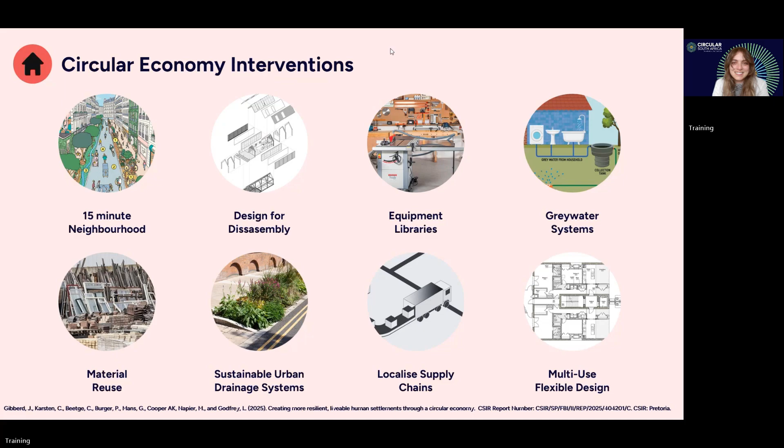So I work in the circularity space, and it's a space that I've worked in for a couple of years. I call myself a community architect because my approach is to use community, large groups of people, towards the green agenda and circularity. In Africa, ironically, circularity is not new.

I'm referring to communities of practice within the peri-urban spaces. Everything is recycled, reused to death. This is mainly due to, I'd say, maybe poverty, or just the nature of being able to reuse stuff.

However, in mainstream architecture, we do not do this so much for various reasons, be it legislature, be it the risk that engineers and architects in the city see in reusing building materials or construction demolition waste, as it's called, CDW. So I set myself the task of creating various projects that I'm going to present to you that showcase that it is possible to recycle and reuse material, whether from industrial or other sources, and also from demolition sites, and reuse it into buildings.

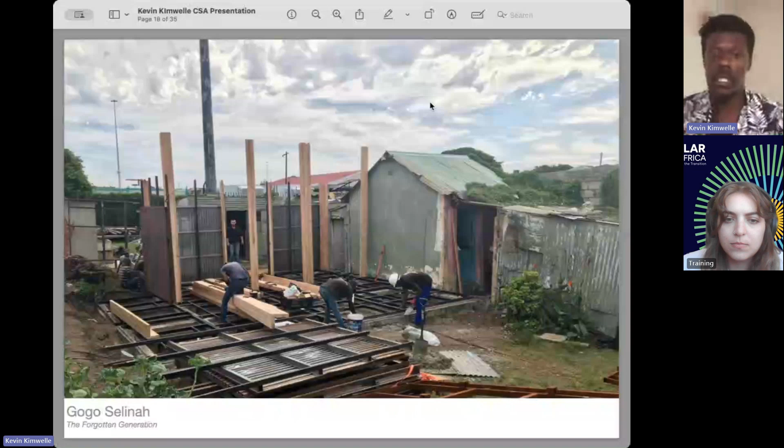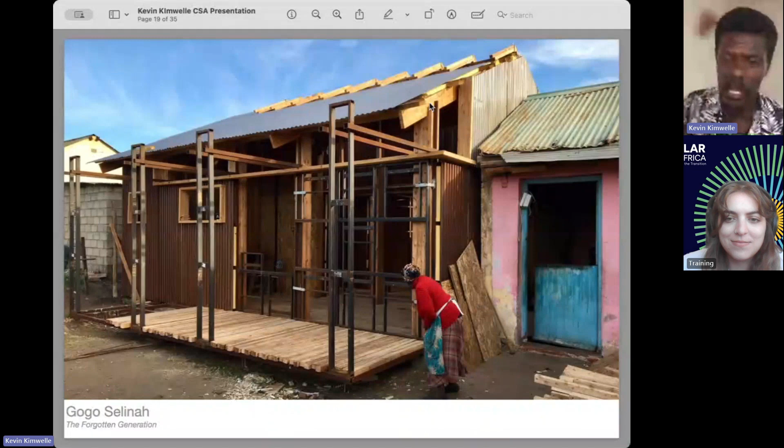So even the foam inside the walls is from recycled refrigerated truck foam. Refrigerated containers usually have foam to create thermal insulation, so we reused that in this building. It was long hours creating this. Oh, and by the way, this was built in the middle of the COVID crisis, so we could only have about 5 of us on site

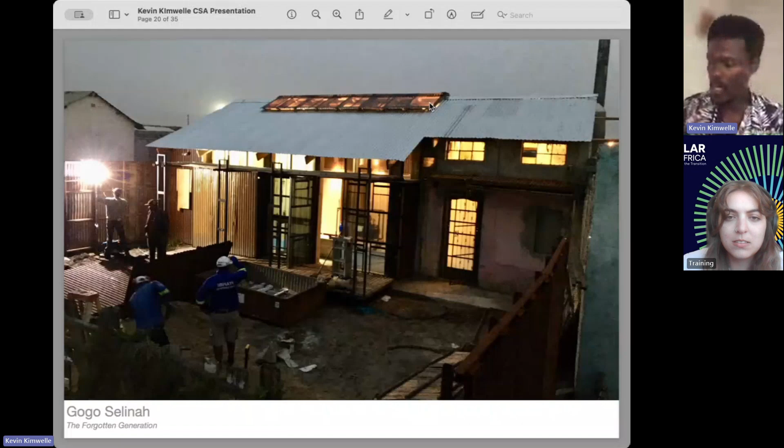building this structure. This is Gogo Selinah in her new home with a visitor here. And the home itself—oh, by the way, the floor, we got it from Isuzu. They had demolished an old office, and we took that office wood and rebuilt the entire floor from it.

And I guess this is why we do what we do, just seeing the change that is possible and giving others new life and hope beyond the building.

For the V&A Waterfront, this project is very interesting because in this case we actually took the idea of circulation as circularity to the limit. We mapped the area and realized there were about 9 different sources. This project was 3 years in the working. For a year, all we did was collect material, clean it up, understand it, see where we could reuse it, and negotiate with the City of Cape Town so they could approve this design.

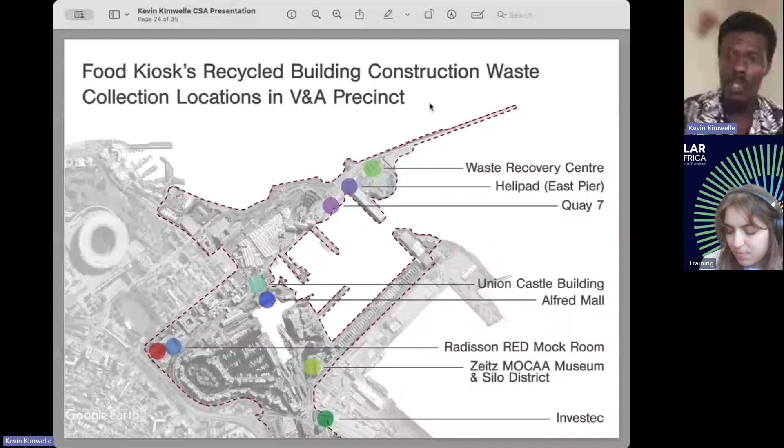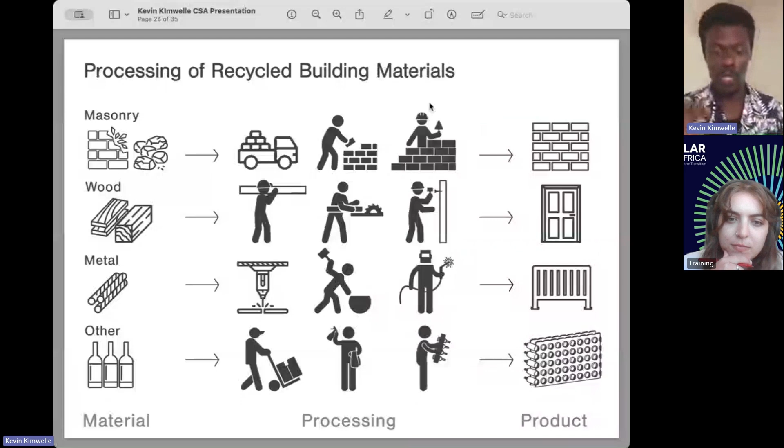So it was a bit of a long process, educating our workers, because I intentionally took workers from the township, brought them to the area, and started teaching them how to recycle and reuse. This is a bit of a map, just showing where the various materials are coming from. We tracked everything that was coming from this site so we could have an inventory of materials.

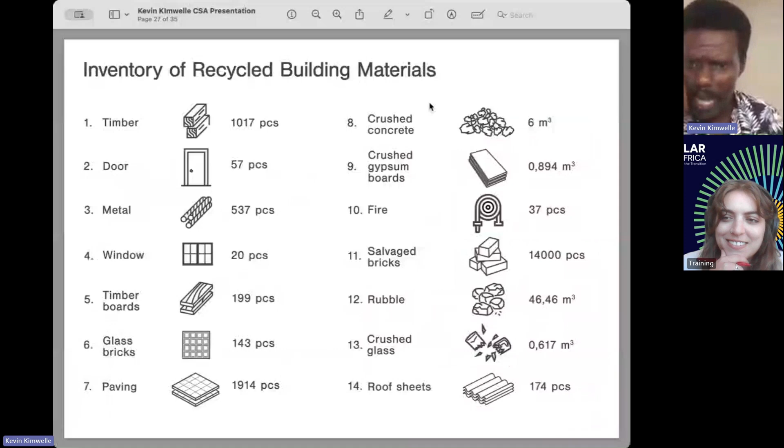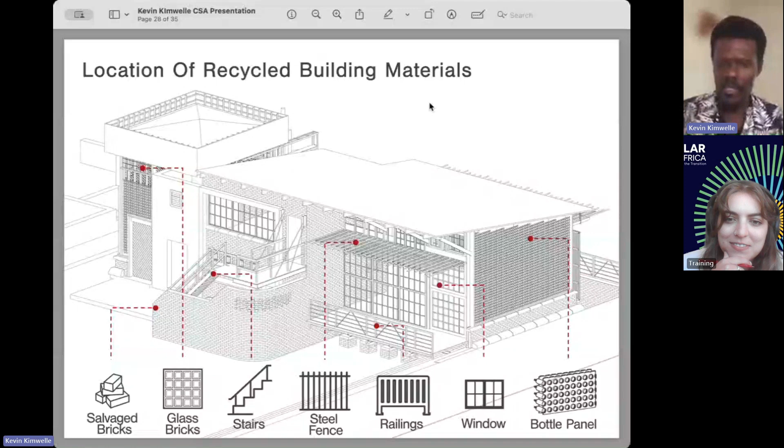Through that inventory of materials, we're able to design and realign a design until we could get something that worked. This is a very rudimentary perspective, and it needed to be rudimentary, not fancy at all, so that everybody could understand what goes where and why. You can clearly see where the salvage bricks are going, the steel fencing, the palisade fencing, and the wine bottle wall.

The design looks at circularity within the building itself, but also in terms of food. So the design is a kiosk or a food pavilion, and next to it is a garden. You can see the garden over there, and the food is grown, spices, vegetables, etc., to supplement what goes into this cafeteria. Rainwater collection obviously is a big thing.

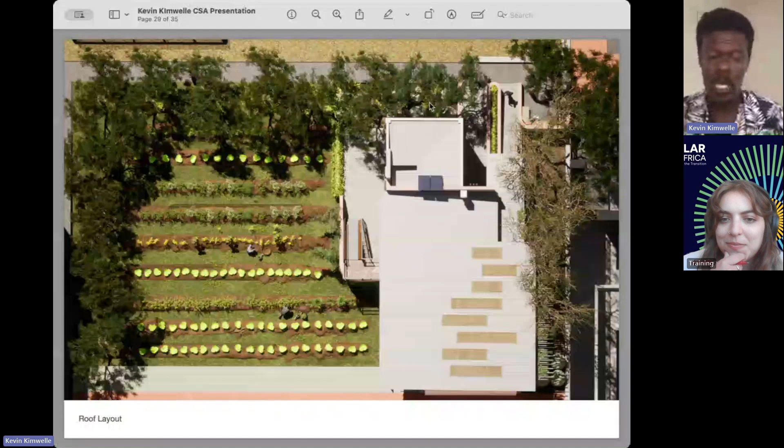In all the work that we do, passive design by default is the approach we use, meaning natural lighting, natural ventilation, we rethink rainwater collection, etc. So that's the design that you see there.

In terms of circularity, especially in this talk, what's interesting about this building is we tackled the two waste materials that come from demolition sites that have the highest carbon footprint. The two are actually concrete and gypsum boards. What we've done here is we took the concrete, broke it down into various components, and we were able to reuse them. In fact, what you're looking at is 3 different concrete mixes for different uses, from structural to screed use. So we were able to reuse and figure out how to reuse demolished concrete.

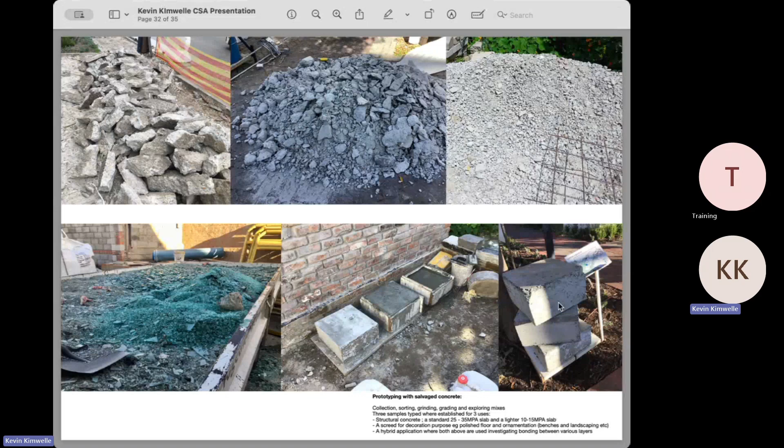The other is gypsum boards, just because whenever they go to landfill, wherever there's a gypsum board, nothing grows. It just totally destroys the earth. What we did is we took that gypsum board, figured out a way of taking the paper out of it, crushing it, and reusing it in 3 different ways, or 3 different textures. What you're looking at on the bottom screen is essentially a form of finish for pointing and jointing that uses this waste. Instead of that waste going to landfill, we're able to use it back in terms of aesthetics.

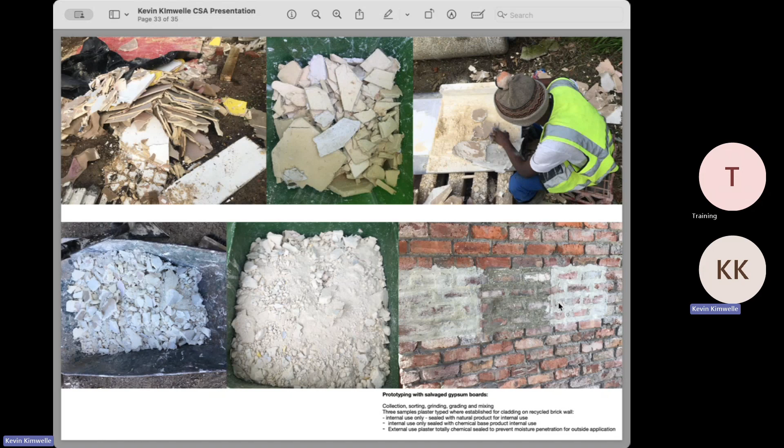That building actually got nominated for the Construmat Awards. It was one of 3 buildings nominated from Africa, and it was purely by nomination, meaning they go through a very extensive process to ensure that the buildings nominated are green.

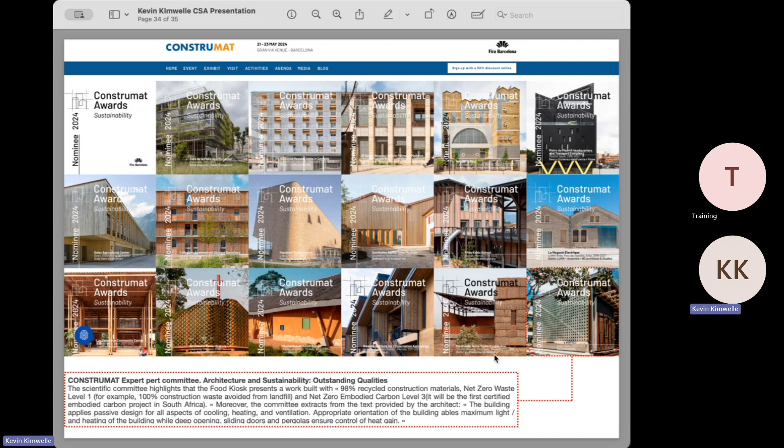For me, circularity is one of those things in this generation that we have to think about holistically, including everybody: researchers, communities, architects, professional consultants, entire communities. That's where the success of these projects has been, in being able to bring different people together in order to attain buildings that are highly recycled.

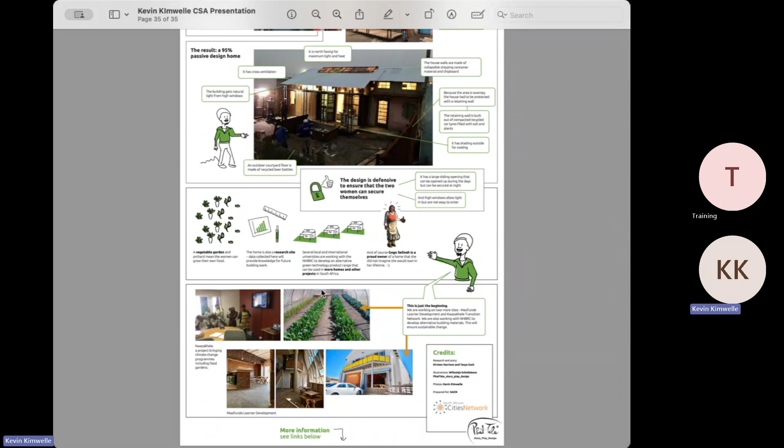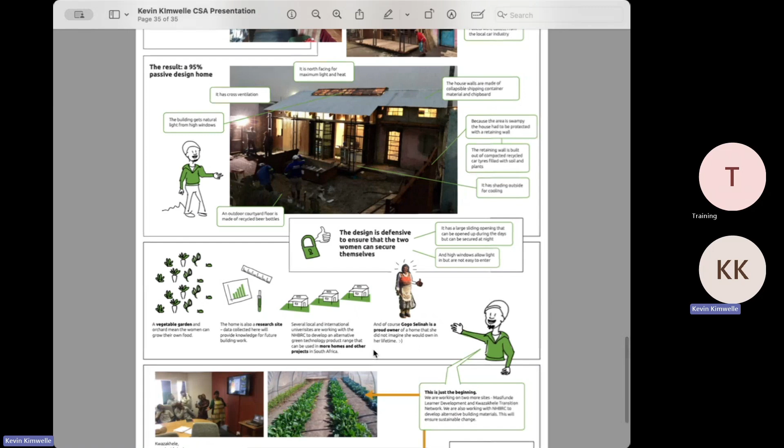And I think that's the last slide. So that's the work I do. It's very much, and I think you can see why I call myself a community architect, the idea of community architecture being able to pull different people, different stakeholders into the circular space.

The circular space becomes much more impactful, especially in Africa, where we have a big discrepancy between those who have and those who do not have. This is an opportunity for us in Africa to really ride on this wave of circularity and give it meaningful impact, socially and economically, because you can already see the social impact. Now imagine the economic impact, the kind of businesses we could roll out from using demolition waste.

Obviously, there would have to be a form of central collection place. That's a business opportunity. Middlemen who handle transportation, all these are business opportunities that can really be used if we start looking at demolition waste as a resource. Thank you very much.

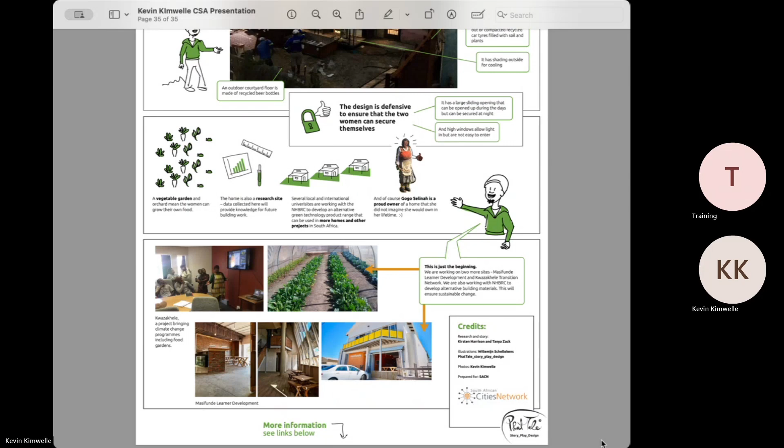Thank you so much, Kevin. That was absolutely fantastic and just really, really inspiring to hear about all the amazing work that you've done.

What I think is really nice about your work is that it rounds up the circular economy in its four principles: designing out waste and pollution, keeping materials at the highest value, regenerating nature. I see the agricultural practices, water saving and collection techniques, which are very circular too. But the fourth principle we at CSA have added, benefiting all members of society, is so important in the African and especially South African context. Your work speaks to all of it, and it's a brilliant example of how circularity can be achieved in this space.

So I was curious about the people you bring into your projects, who those stakeholders are and how they're involved, the skills but also the opportunities you develop for those people, specifically the ones looking at the demolished material but also transforming it into something new, adding new value to it. Would love to hear your thoughts on that.